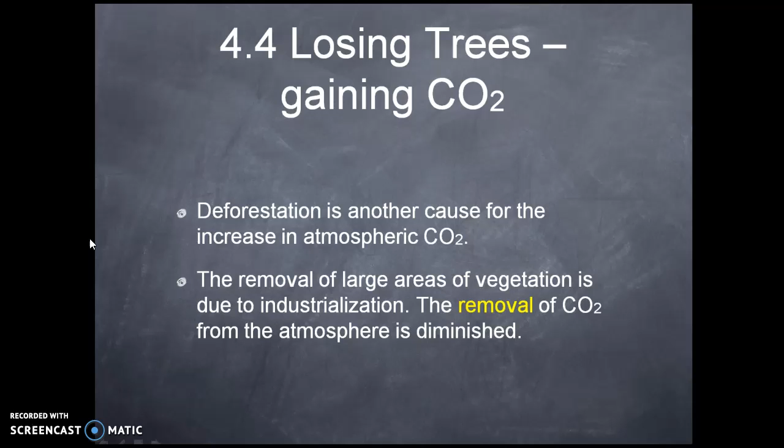And why are we removing all the trees? By the name of industrialization, or maybe making it more luxurious. The removal of large areas of vegetation due to industrialization is one of the culprits of the increase of carbon dioxide in the atmosphere. The removal of carbon dioxide from the atmosphere is diminished since the trees are gone. The carbon dioxide emission is increasing because we keep dumping carbon dioxide into the atmosphere, but there is no way of removing it. So that is the problem.

What is a fossil fuel? The term fossil fuel is used to describe those materials that have been formed over millions of years by the decay of plants and animals.

Coal is formed when the stems from the decay of large populations of swamp plants, over a period of millions of years, get hardened and become coal. Oil and natural gas are formed by the stems from the decay of marine organisms such as algae and plankton. These things take millions of years to harden and become fossil fuels.

There are many fossil fuels, and out of them, methane gives the most energy when you burn one kilogram of it, then gasoline, then coal. So some of them are more efficient than others, and hydrogen is a non-fossil fuel which gives out more energy than any other fuel.

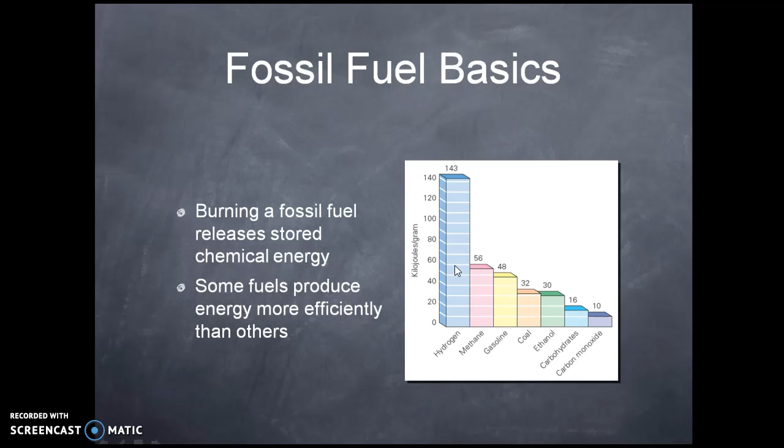Burning fossil fuel releases its stored chemical energy. As you can see from this chart, some of them are more efficient than others. Carbon monoxide gives you the lowest amount of energy, and methane gives the most amount of energy among fossil fuels. You can see hydrogen right here, which does not fall in the fossil fuel category, but gives the most energy per gram burned.

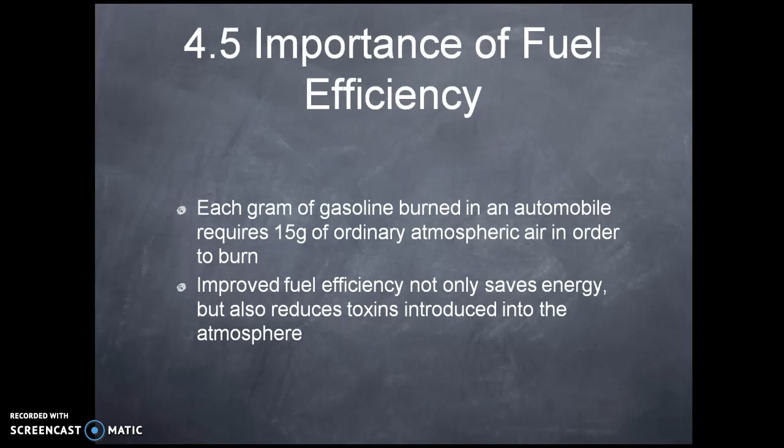Importance of fuel efficiency: each gram of gasoline burned in an automobile requires 15 grams of ordinary atmospheric air in order to burn. So by making more improved engines, we could not only save energy but also reduce the toxins released into the atmosphere.

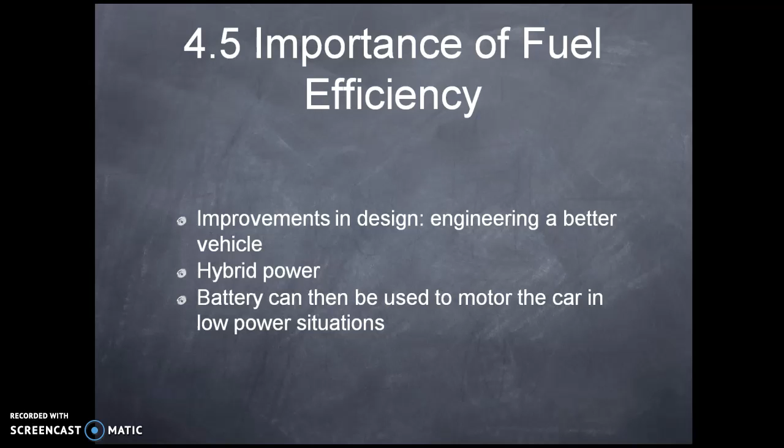Importance of fuel efficiency: improvements in design, engineering a better vehicle, sometimes like making a hybrid power, where whenever a huge amount of energy is not needed, the battery could be used to operate it, and whenever you need excess energy, the fuel should be used. So if you have a hybrid power like that, the emission of carbon dioxide would be a little less compared to sole fuel-based engines.

The cleaner fuel - cleaner means not dust, but the way it produces carbon dioxide into the atmosphere. When you look at all the other fossil fuels, methane gas is cleaner because it produces fewer toxins compared to the other gases when you burn them.

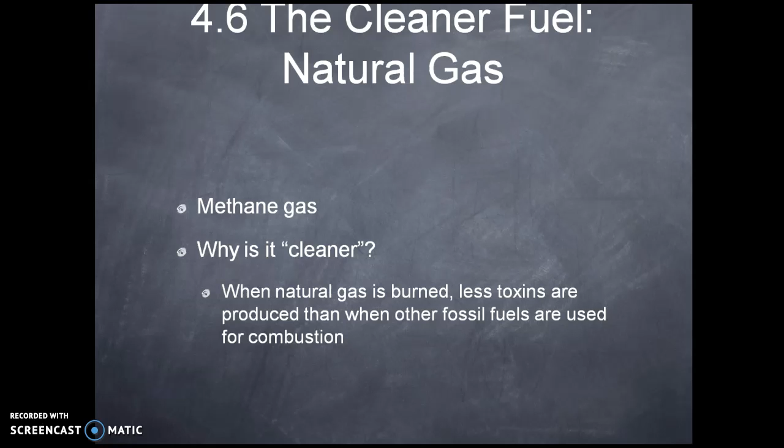Coal is the cheapest fossil fuel, and we have it in abundance. So when it's very abundant, what is the problem? It's the carbon dioxide emission. When you burn coal, it gives the most carbon dioxide into the atmosphere.

Coal produces nearly one-third more carbon dioxide than oil fuel. Coal is responsible for 40% of the 30 billion tons of carbon dioxide released into the atmosphere by human activity. It's very inefficient - only 2 to 4 joules of every 10 joules of heat can be converted into useful energy. That is the reason, even though coal is very abundant, we do not prefer to use it, and we try to go for alternate sources just because it is not very efficient.

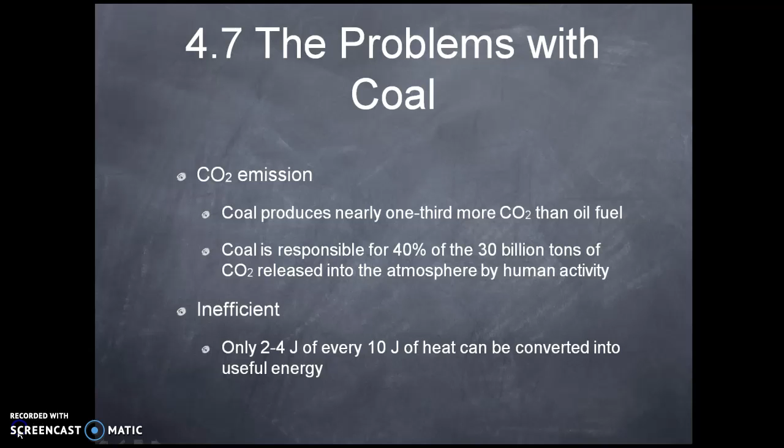Making the best of coal use. There are several methods used to try to reduce the carbon dioxide impact of coal burning.

The first one is carbon capture and storage. So whenever the carbon dioxide is emitted, instead of leaving it to the atmosphere, you store it and capture it, which is called sequestration.

The other way is gasification. So instead of leaving the carbon dioxide into the atmosphere when you burn the coal, you make it react with some other chemical and turn it into another gas, then either capture it or release it into the atmosphere. So coal is transformed into a mixture of gases, and carbon dioxide is easier to capture.

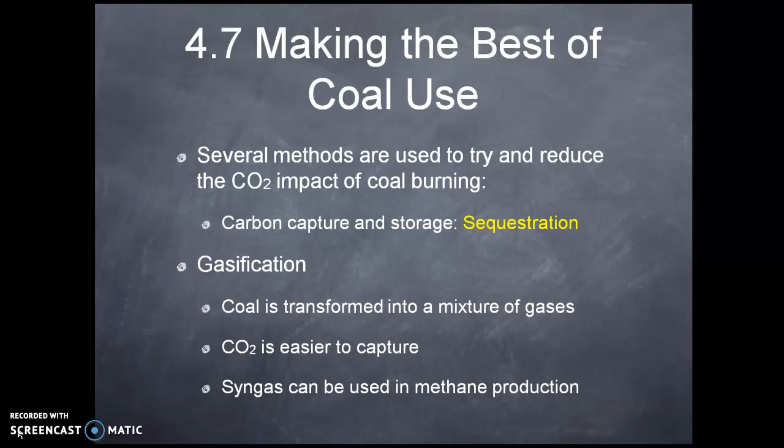So syngas can be used in methane production. The syngas, a little bit cleaner version of coal, can be used in methane production, which is a cleaner gas.

Still coal is problematic because acquisition is dangerous and the pollution is very serious, causing severe respiratory effects on those who live nearby coal burning plants. Whenever they dig these coal mines, there could be radioactive elements released into the atmosphere, such as uranium, thorium, radium, and mercury.

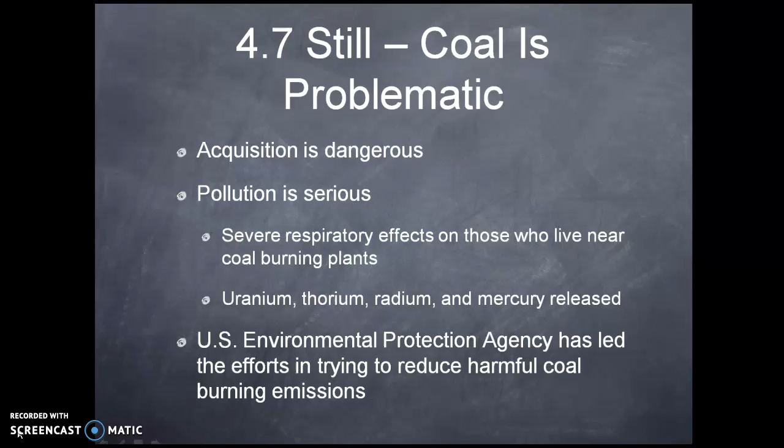The U.S. Environmental Protection Agency has led efforts in trying to reduce harmful coal burning emissions. These agencies try to protect humans, reduce coal acquisition, or find a way to decrease the toxification of the atmosphere.

So what are the alternatives? Alternative sources should be less toxic and more abundantly available. Alternative energy sources used right now give about 15% of the energy required for commercial use, and these sources should be cleaner and safer.

Even though alternative sources are much safer and cleaner, we are not using them because of the cost. We are still reluctant to use these alternative energy sources because fossil fuels are still very inexpensive.

Nuclear fuels, a better way. Nuclear reactors are based on fission. Fission is nothing but the breaking apart or decomposition of large nuclei. Whenever you take a nucleus and break it into pieces, that's called fission, and a huge amount of energy is produced.

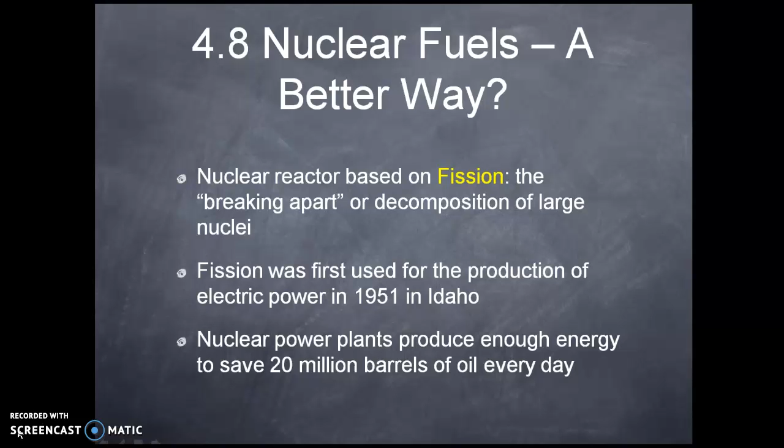Fission was first used in the production of electric power in 1951 in Idaho. Nuclear power plants produce enough energy to save 20 million barrels of oil every day.

Advantages with the drawback: nuclear power plants do not emit carbon dioxide, so it is very safe for the environment. The major drawback is the safety issue. In the past, huge accidents happened at three locations: 3 Mile Island, Chernobyl, and Fukushima. This generated significant anxiety in the public sector.

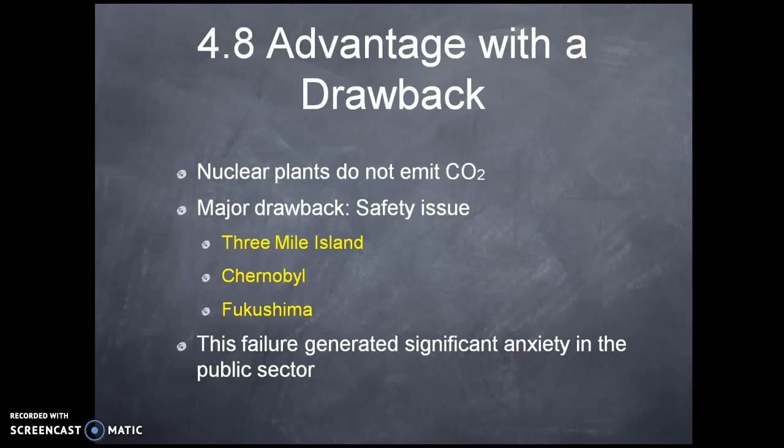Even though it's an excellent energy source, when an accident happens, hundreds of thousands of people could die, and radioactive elements could get into the atmosphere, bringing a lot of health issues to people.

One example is the tragedy of Chernobyl in Ukraine. In April 1986, a 1 gigawatt reactor was destroyed in an accident, and the reactor failure resulted in the escape of nearly 200 tons of radioactive material. The radioactivity in the fallout was about 400 times harsher than that produced by the Hiroshima atomic bomb.

Everybody is aware of the Second World War, and the atomic bomb used in Hiroshima and Nagasaki, Japan. We hear stories that still there is no sign of trees or plants growing in that location. So you can imagine how bad it could be, being 400 times harsher, when there is a failure in the nuclear reactor.

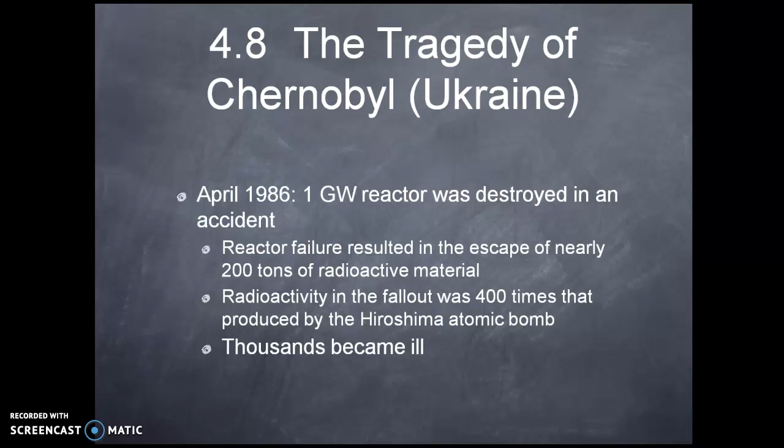Ideal energy sources should not deplete resources or harm the environment. In the US, about 5% of the total electricity comes from such sources, which would not harm the environment or deplete natural resources.

There are two broad categories of energy sources. One is continuous sources, where the source is working all the time, such as hydroelectric and geothermal. These things will be there forever.

Variable energy sources have a rate of energy production that varies with the time of day, for example solar. Half of the time is day and half is night, so half the time you have sun and half you don't. In summers you have a huge amount of sun, and in winters less, which is why these are variable resources.

Others vary with the weather conditions, such as wind and waves. Sometimes we have more, sometimes we have less.